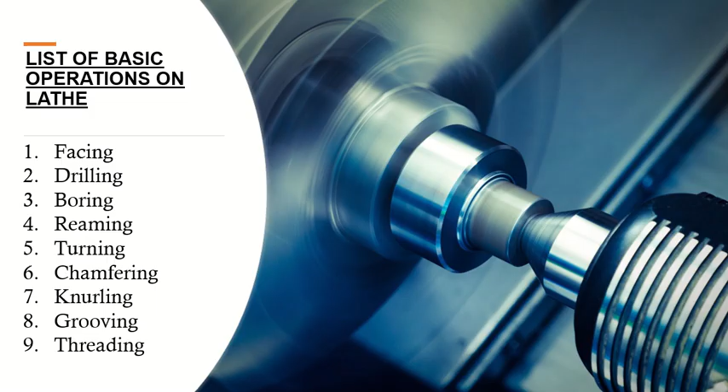Hello everyone, I am Vaishnavi and I am presenting the topic operations on lathe machine. The basic operations which we are going to discuss are facing, drilling, boring, reaming, turning, chamfering, knurling, grooving, threading.

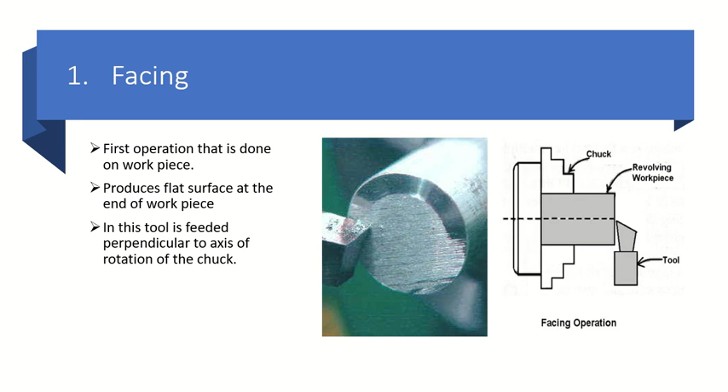First operation that is done on workpiece is facing. It produces flat surface at the end of workpiece. In this, tool is fed perpendicular to axis of rotation of a chuck.

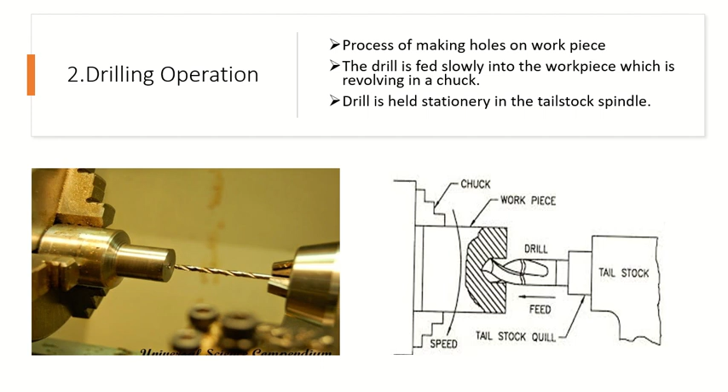Next operation is very well known operation, that is drilling operation. It is a process of making holes on workpiece. The drill is fed slowly into the workpiece which is revolving in a chuck. Drill is held stationary in the tailstock spindle.

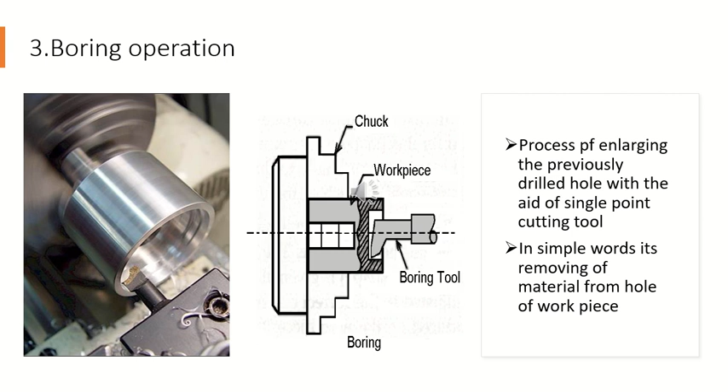The next operation after drilling is boring operation. It is process of enlarging the previously drilled hole with the aid of single point cutting tool. In simple words, it is removing of material from the workpiece. Here you can see the single point cutting tool which is enlarging the previously drilled hole.

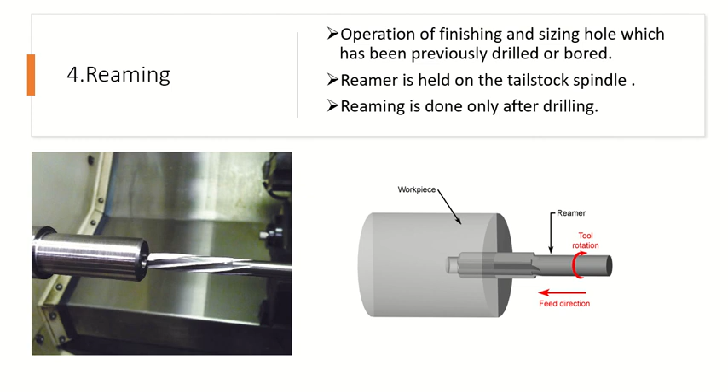The next operation is reaming. It is operation of finishing and sizing hole which has been previously drilled or bored. Reamer is held on tailstock spindle. Reaming is done only after drilling. The difference between drilling, boring, and reaming is drilling is making hole, boring is enlarging that hole, and reaming is

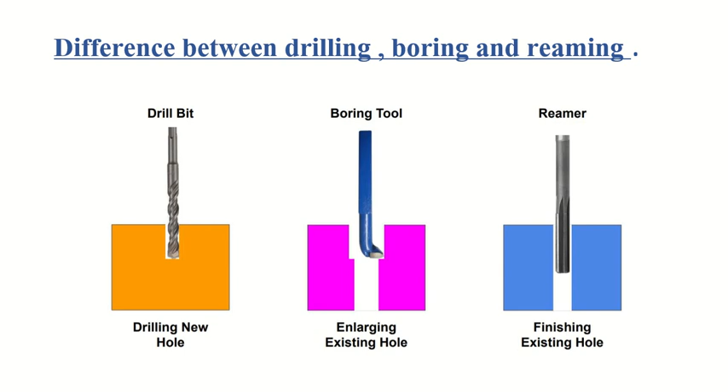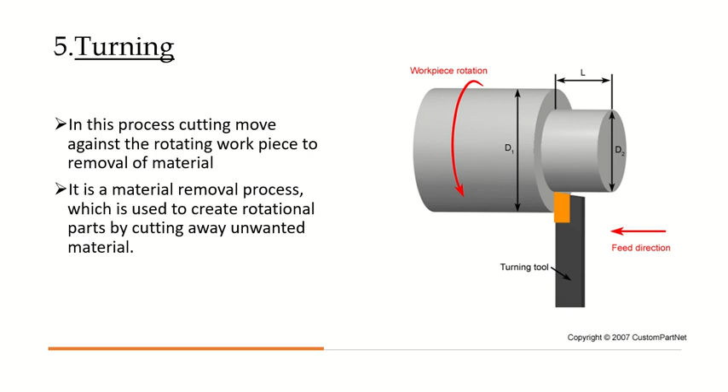finishing that hole. In this process, cutting tool moves against a rotating workpiece to remove material. It is a material removal process which is used to create rotational parts by cutting away unwanted material.

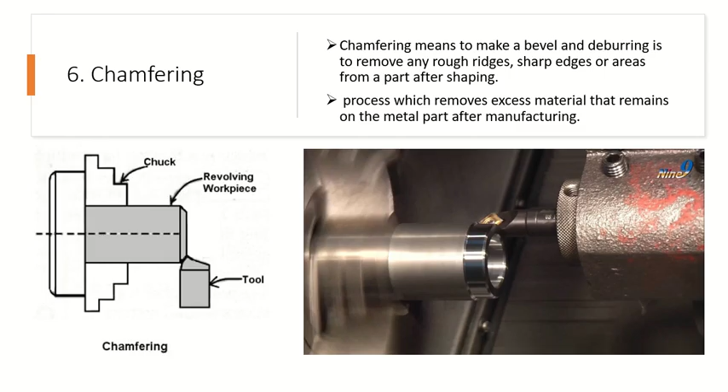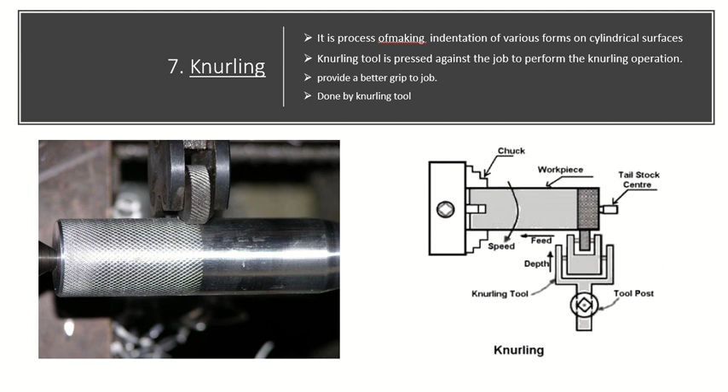After that, knurling. Knurling is a process of making indentation of various forms on cylindrical surface. Knurling tool is pressed against a job to perform the knurling operation. It provides a better grip to job. It is done by knurling tool.

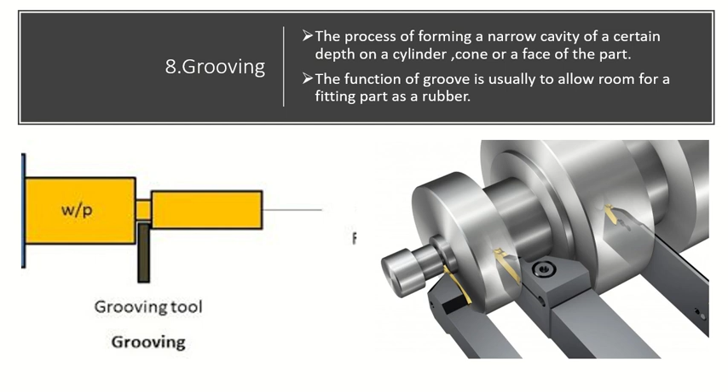Next is grooving. Grooving, the process of forming narrow cavity of a certain depth on cylinder, cone or face of the part. The function of groove is usually to allow room for a fitting part as a rubber.